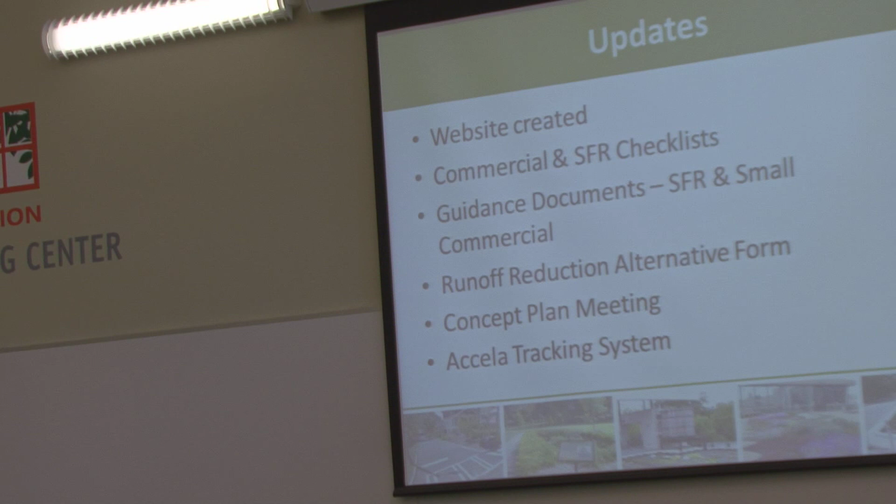Just real quick, I wanted to update everyone on some things that have taken place since we adopted our ordinance back in February. We've updated our website, thanks to Alan Harmon, the man behind the camera right over there. He did a great job putting all the reference materials and checklists related to our new ordinance on that website, which has been very beneficial and organized us a little bit. We've also updated our commercial and single family checklists to reflect the new ordinance changes.

We've developed some guidance documents. Some of y'all are aware of the single family residential guidance document we've put together; you can download a copy from our website. We're also working on a similar guidance document for small commercial redevelopment projects. We see a lot of mom and pop small developments in Atlanta in these urban corridors that don't have enough money to hire a full design team, so this is a way for us to help out with ideas like retrofitting a landscape island into a bioretention area or fitting a tree well in your parking lot. That should be out in the coming months.

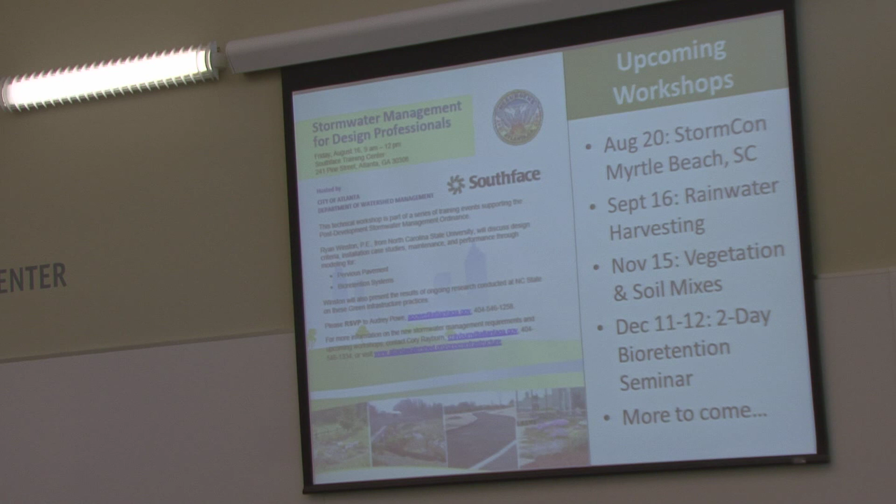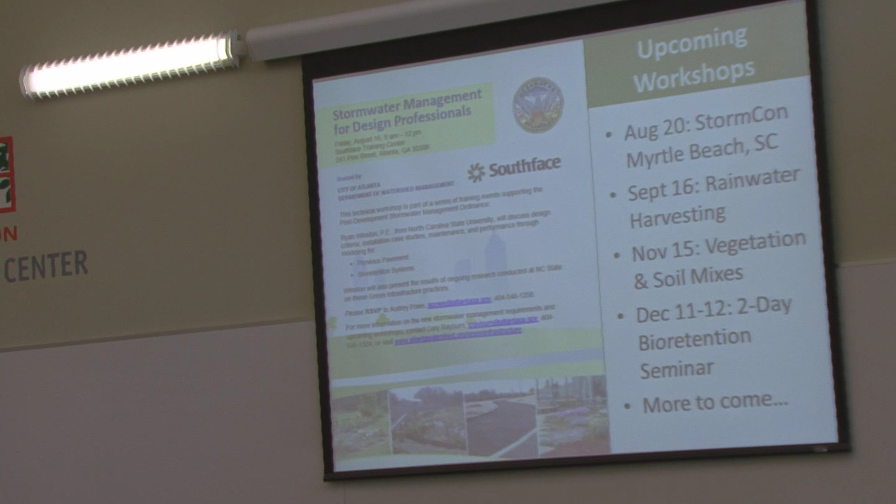This is the first of a series of workshops really focusing in on design for engineers and landscape architects. We want to get as technical as possible in these conversations, because these are new practices, primarily for the Southeast. A lot of these practices, as Ryan will touch on, have been around for many years, and there's been a lot of great research done. So we want to focus in on specific practices in the future.

Our upcoming workshops include: next week, Susan and I are presenting at StormCon up at Myrtle Beach, on the adoption of the ordinance, the processes, and a little technical background. In September, we're doing one on rainwater harvesting here in the Southface building - we've got some great speakers lined up. We'll hear case studies on the Georgia Tech project using rainwater for flushing toilets, and we'll also hear from the Hyatt at Buckhead, who've installed a rainwater harvesting system to handle their cooling towers.

In November, we're planning one on vegetation and soil mixes - we're still looking for some presenters for that. So if anybody has specialty in some of these areas, let us know, and we'd love to have you come present at one of these workshops. We haven't lined up the room yet for that one, so we'll talk to Joy about that possibly.

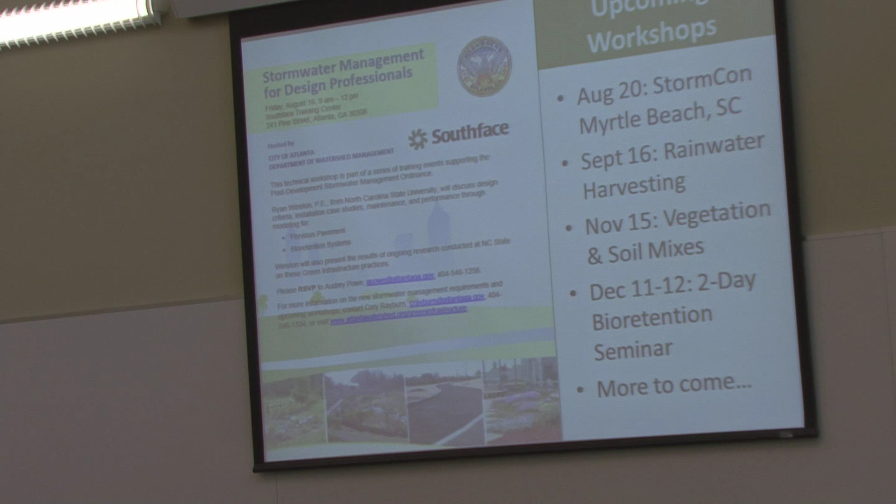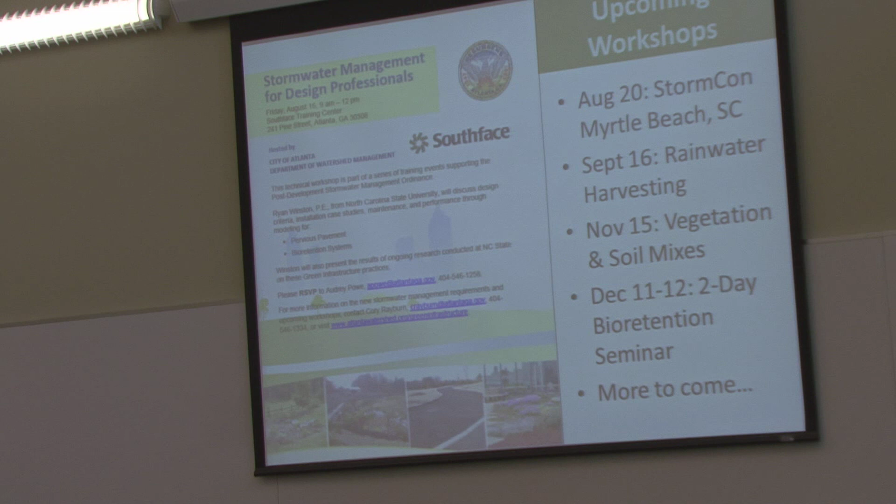Then in December, we're going to have folks from NC State and I believe a couple other specialists from around the country do a 2-day bioretention workshop, and that is going to be very in-depth. There is a fee associated with that one. If you need more information, you can go on our website - I don't think we've posted the flyer just yet, but we're working on that. The City of Atlanta is hosting that, and NC State folks are coming down to present.

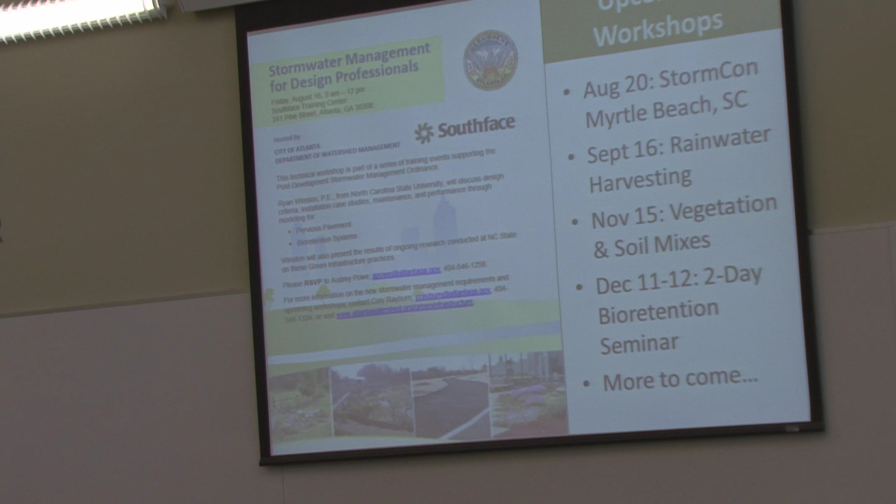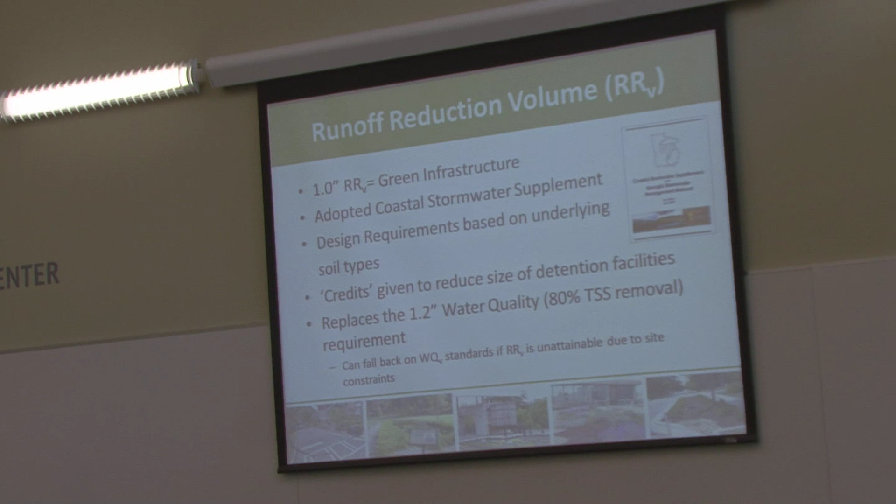So, just very briefly, I want to go ahead and hand it over to Ryan in a second, but I wanted to cover some of the information we're going to be discussing this morning as it pertains to Georgia and Atlanta in our new ordinance.

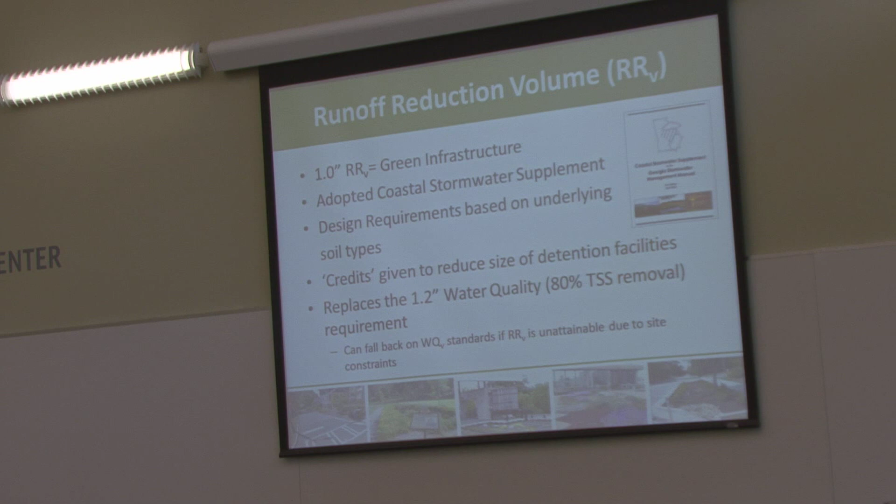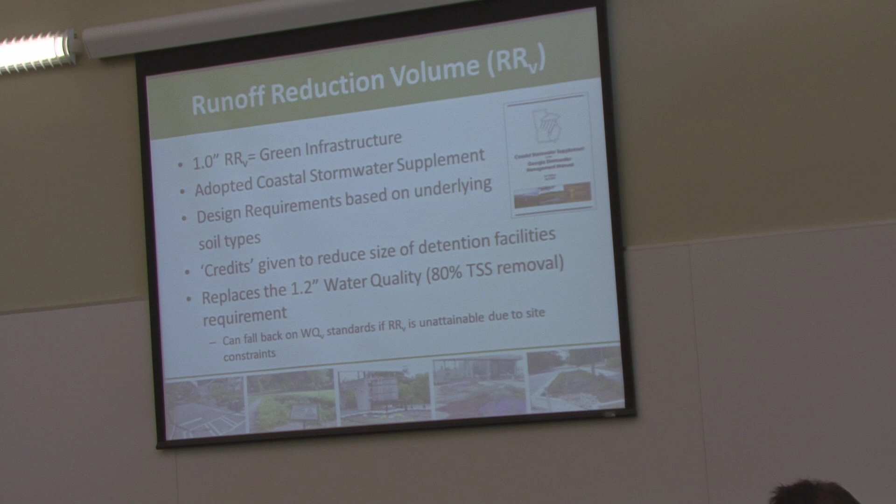We have adopted the runoff reduction volume found in the Coastal Stormwater Supplement, which is our technical design manual for now. We're working on possibly developing a Metro Atlanta design manual. We were just in a meeting a couple days ago with ARC, and they're finally starting to say they're going to update the Blue Book to include some of these practices. It's in the very early stages, but it is moving forward. We're making do with the guidance documents we have and the coastal supplement - those are our de facto design manuals for now, but that should be updated soon.

So the runoff reduction requirement is capturing that first 1 inch of rainfall that would drain off of impervious surfaces.

And keeping it on the job site, either infiltrating it, reusing it, or sending it into a landscape island where it can be sucked up by the plants. The design manual gives you credits for providing green infrastructure on your system, so you can reduce the size of your detention system. It also replaces the 1.2 inch water quality requirement.

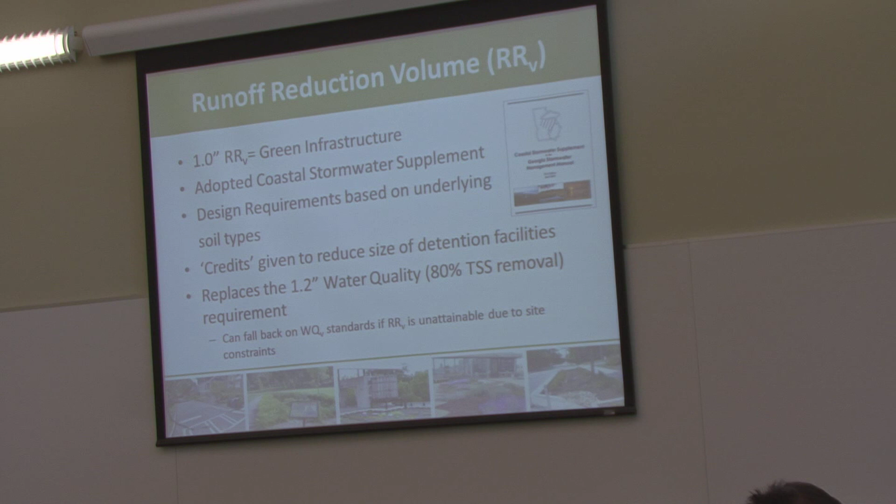If you have a site where, based on the underlying soils or other constraints, you just can't provide the entire 1 inch volume, and you provide written rationale as to why along with some data to back it up, then we'll let you fall back on the 1.2 inch water quality requirement.

Most of the projects that will meet these requirements are commercial redevelopment projects. In Atlanta, there's very little new development where you're clearing woods and putting up a new building—it's almost all redevelopment. For projects less than 500 square feet of new or replaced impervious surface, there's no stormwater management required.

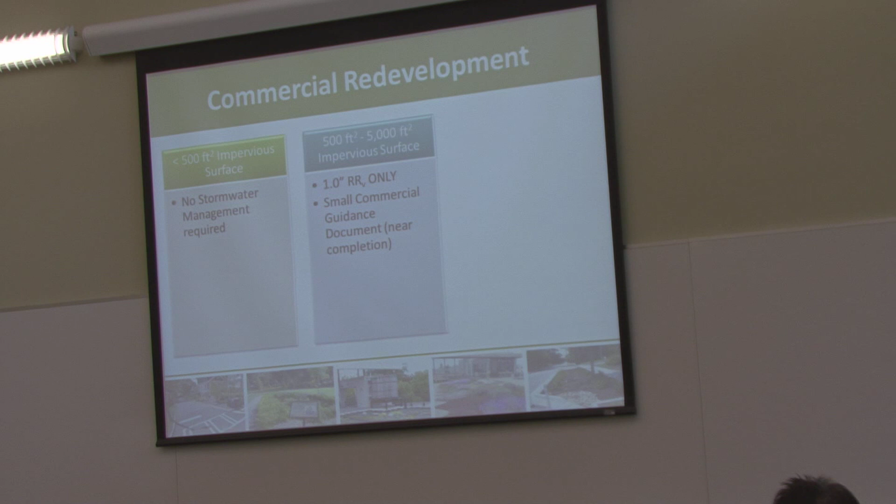Between 500 and 5,000 square feet, you only have to provide that 1 inch runoff reduction volume. Anything above 5,000 square feet requires a typical stormwater management plan with channel protection, rate reduction, and a hydrology study.

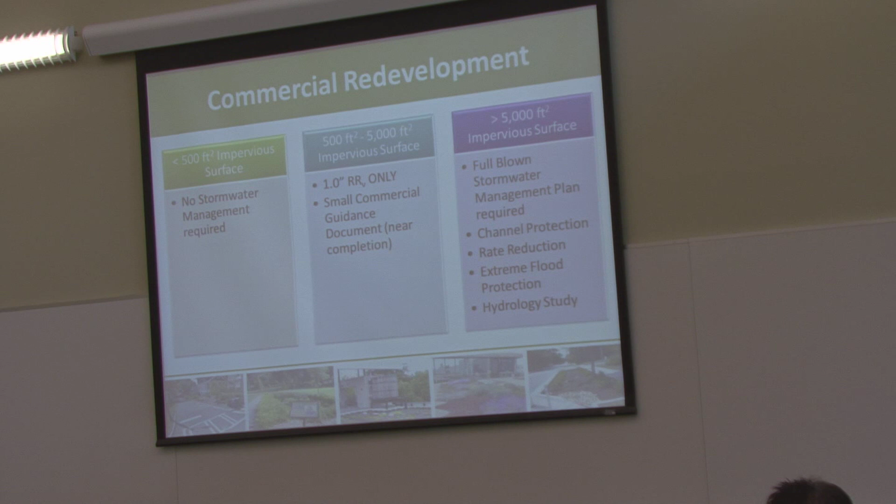Again, we have our guidance document for single-family development. Any new single-family home or large addition will need to provide that 1 inch volume requirement, and we have about six practices listed in this guidance document that have already been pre-approved to work on those single-family lots.

I hope this doesn't do this the whole time—it's kind of jumping around. I think the battery might be low.

We also have, in this book, tear-off detail sheets so you can just tear it off and staple it to your plans and have a good idea of what you'll have on that individual lot.

The concept plan meeting is for commercial projects only—for those categories over 500 square feet of new impervious surface. We want to sit down with you and go over the new ordinance, make sure engineers and developers are aware of the new requirements, and talk about opportunities to use some of these different practices in their site plan.

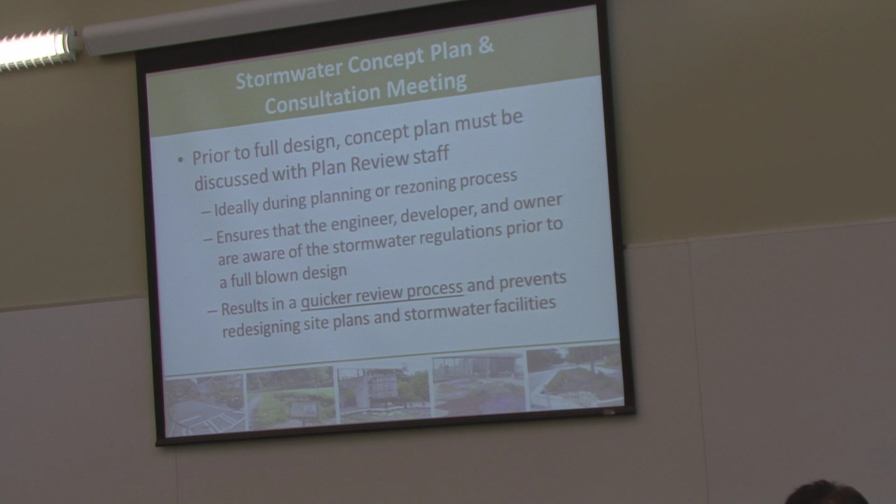So far this has worked really well. We've had over 100 meetings so far.

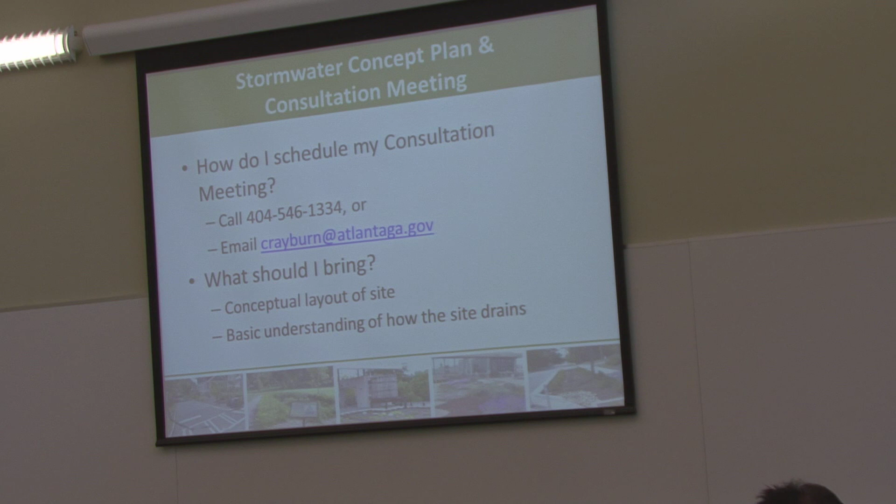Currently I've been doing these meetings just for consistency's sake, but in the future any of the site development reviewers will be able to hold one of these meetings. If you're downtown and want to just stop in, we should be able to take care of you.

Just a brief overview of what we're going to be talking about today with Ryan Winston. He's going to cover pervious pavement, which is basically an underlying drainage layer with an overlying permeable surface.

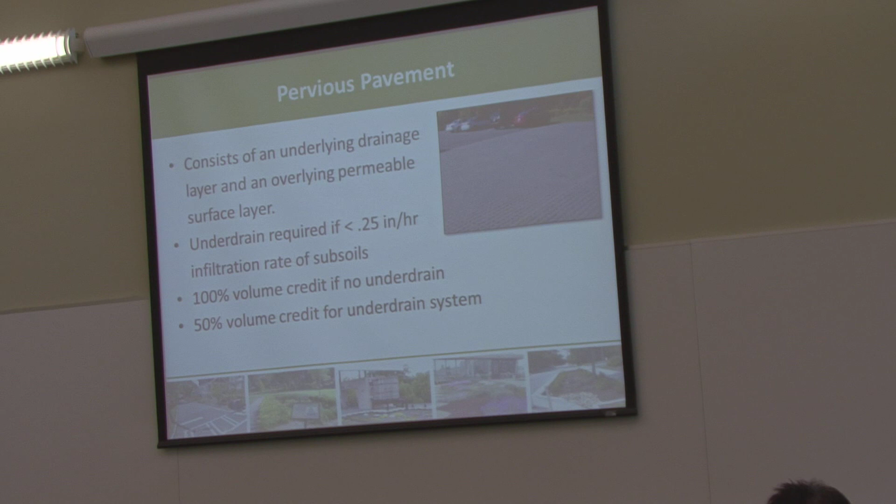Based on our design manual, if you have less than 0.25 inches per hour infiltration of the subsoils, then an underdrain is required. Essentially, if you have an underdrain system, you can only get 50% of the volume credit in the void space underneath that system. If you have better soils, you get 100% of that void space.

One of the new requirements for commercial development is providing infiltration testing up front during the design phase. We've seen some pretty decent infiltration rates—you'd be surprised, I think the majority of our results have been B soils. So there are B soils in Atlanta, you just might have to break through that top layer of compacted red clay to get there. We really do require those types of tests up front when you're putting those plans together.

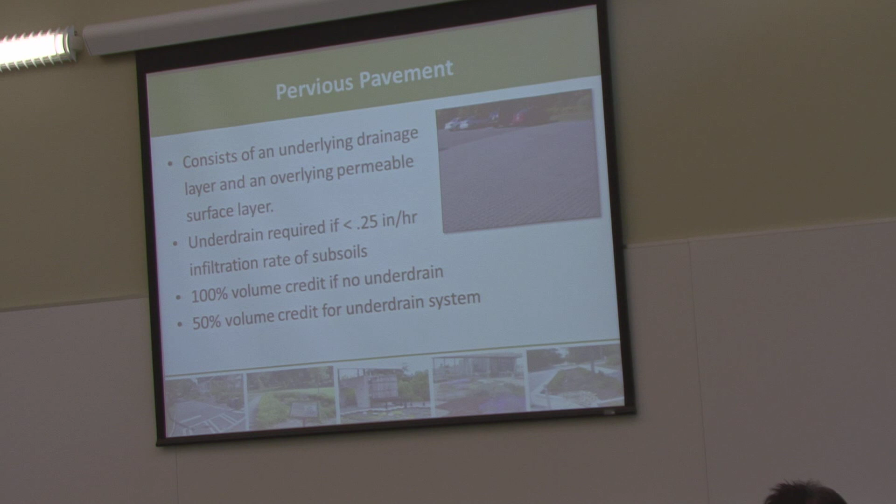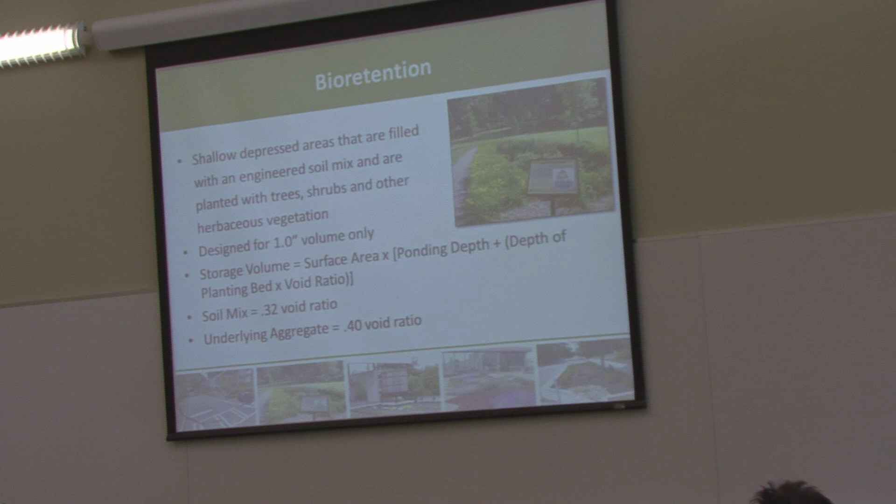Bioretention is another great practice that you can fit in with some of these tighter sites. Bioretention is just a shallow depressed area with engineered soil mix, then it's planted afterwards. If you need additional space, you can provide aggregate underneath that soil mix, and the ratios are listed below. The storage volume you get credit for is the surface area multiplied by the ponding depth.

The ponding depth is typically about 9 inches in the system, so you get full credit for that ponding depth, and then you get the depth of the planting bed multiplied by the void ratio. That'll give you a total volume for that practice.

Okay, and with that, hold on, let me grab something real quick. Going to introduce our speaker.

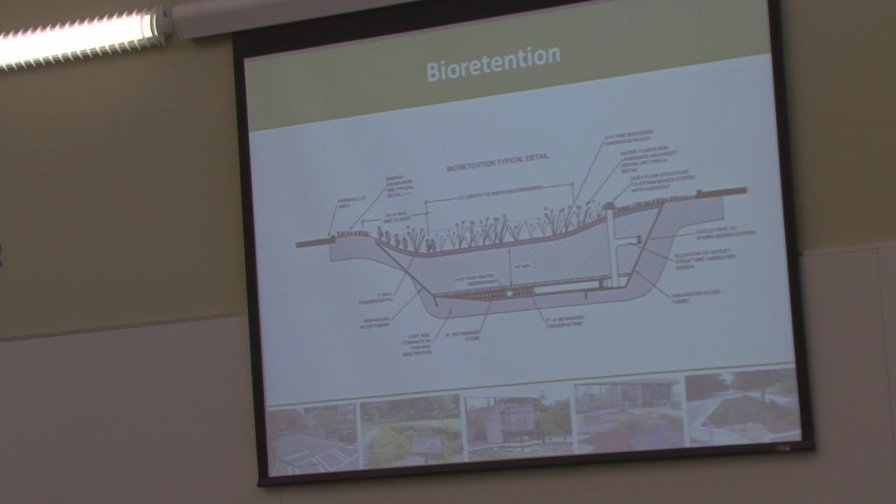We have a typical detail we're still working on for bioretention. This will be in our small commercial guidance document. You can see it has a raised underdrain on it, which is something that we like. If you do have poorer soils, this will develop an internal storage system. Ryan will go into that a little bit more. That's something that NC State has been doing a lot of research on, and it's something we're looking to adopt as well.

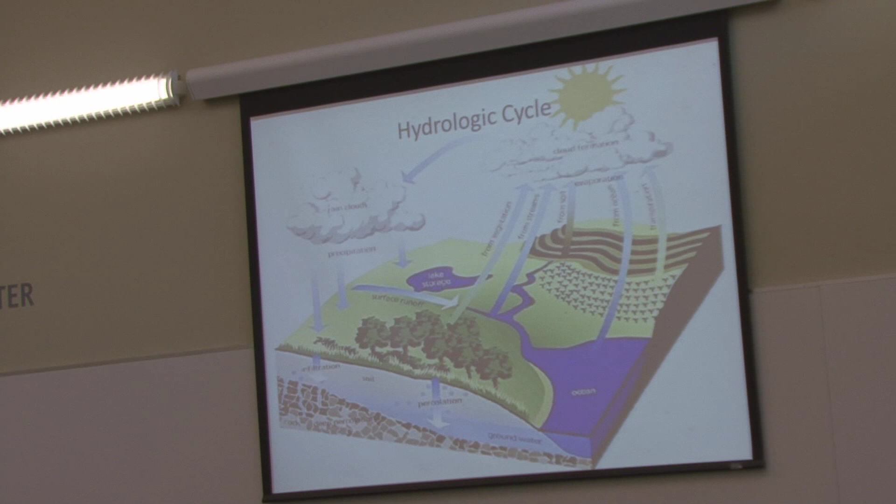As that hits the ground, we get surface runoff, and that's what we're really worried about with stormwater management. So when we pave, like we have the parking lot back over here, you drastically change that water cycle. You've got the vast majority of your water running off and down into your storm drain network. That's some of the things we're trying to change with our low-impact development practices.

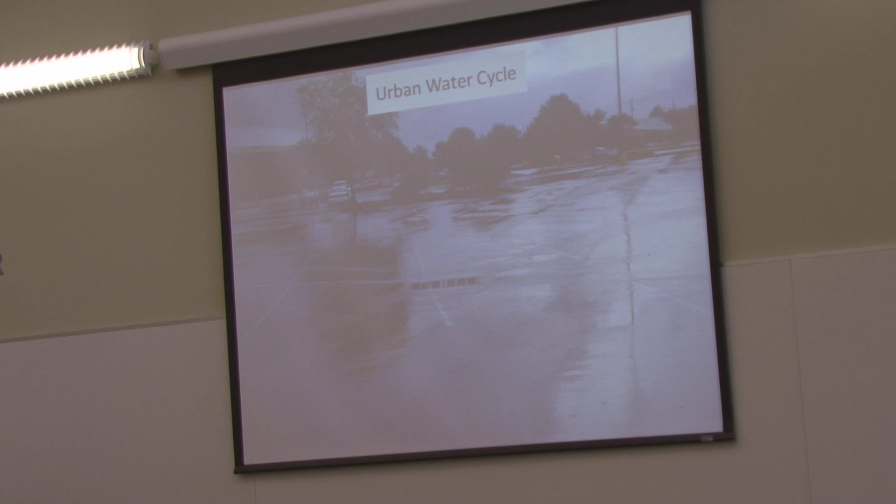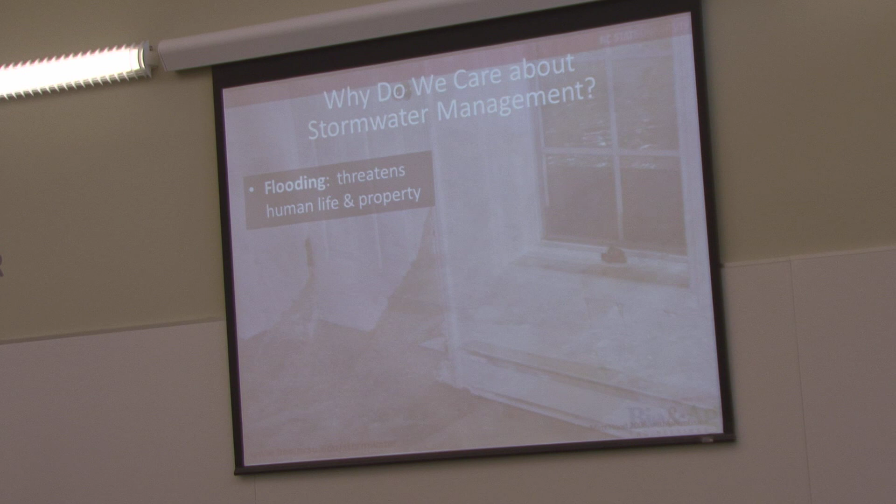So why do we care about stormwater management? The first one would be flooding. If that's your house, you're really in bad shape, so obviously it threatens life and property. Especially with a lot of the tropical events that we get that have first names here in Georgia and in North Carolina for that matter.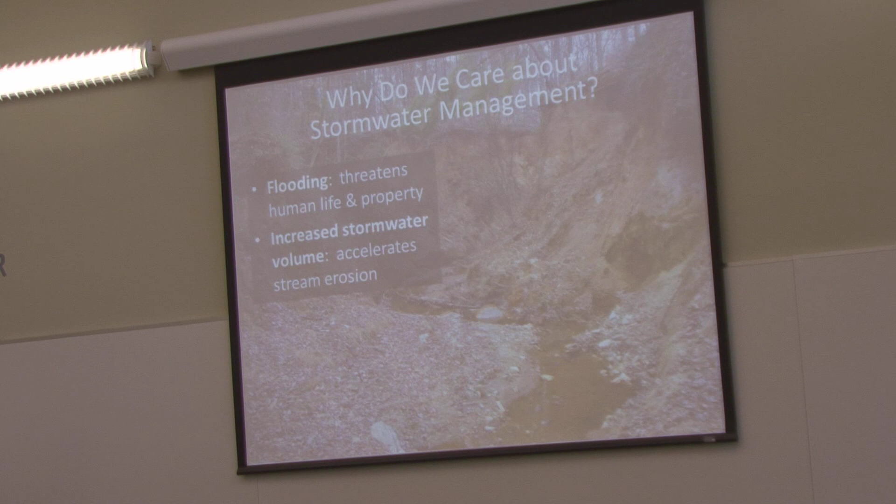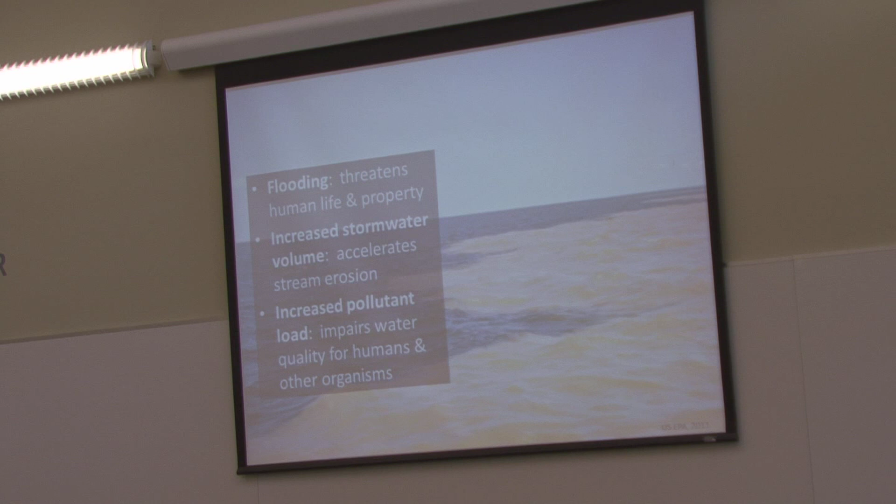Increased stormwater volume means we're getting more runoff going through our streams, and so you get stream bank erosion. This is actually on our vet school campus up at NC State - I hate to admit that, but it is. And then you get pollution: more pollutant load, more volume of runoff, and therefore more pollution coming off of your urban surfaces. That impairs our water quality, hurts our fishing and shellfishing waters, etc. So there's a lot of reasons why we care about stormwater management.

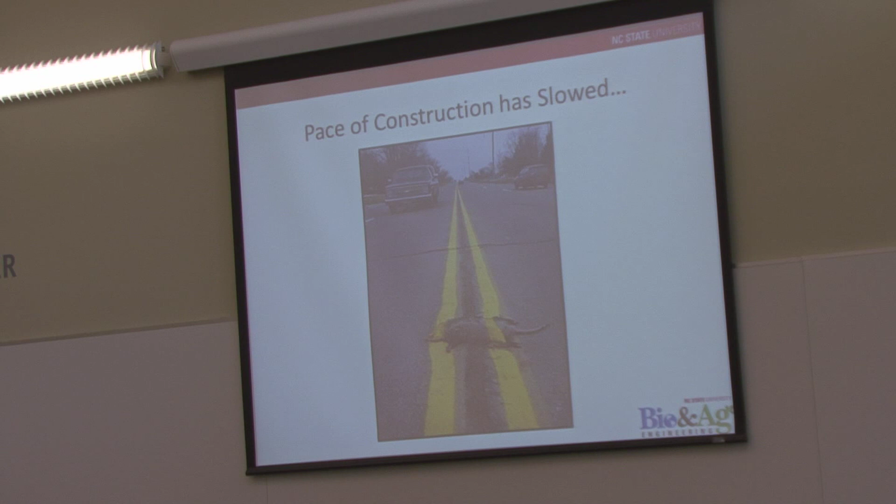Our pace of construction has slowed substantially in the past 5-6 years compared to 2006, 2007. So I think this is a really good time to go back and look at the way we develop. Obviously the City of Atlanta is doing that with the changes to their ordinances. We've got a chance here to really change our paradigm and what we do as far as development goes.

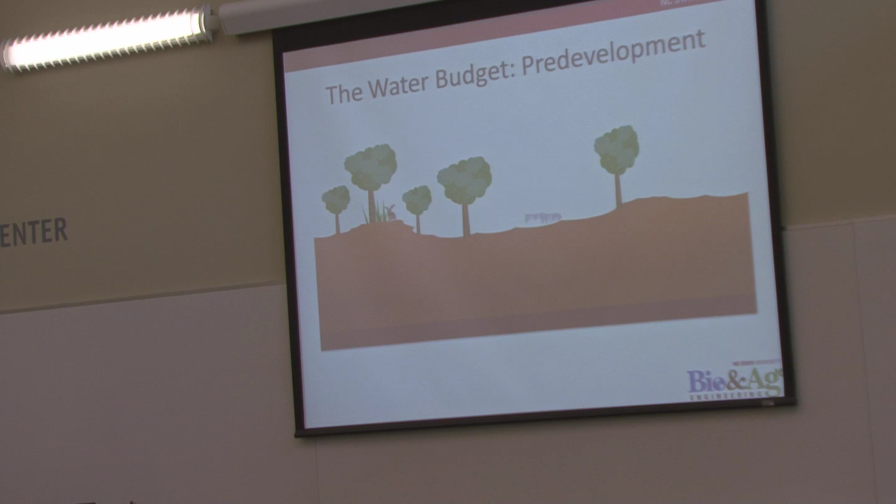So just a quick water budget for you. In pre-development conditions where you've got, let's say, a forest, which is typically what we'd have here in the southeast, you'd have a lot of canopy interception and just general depressional storage in your watershed.

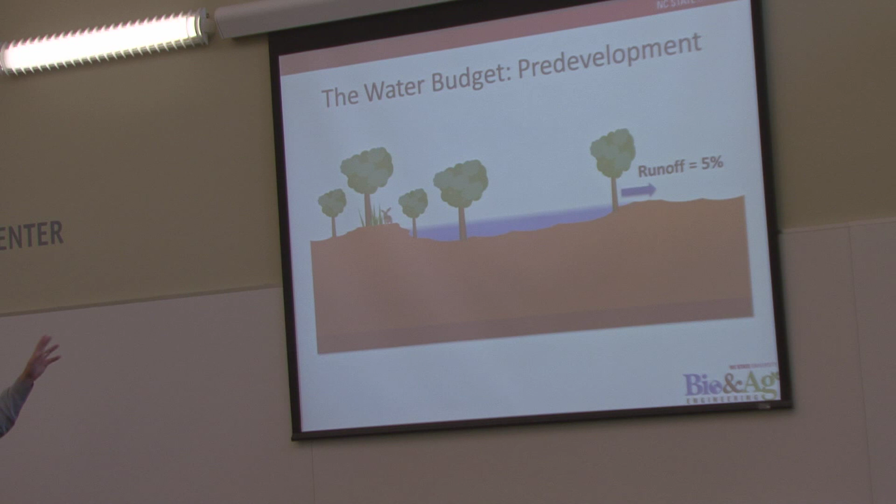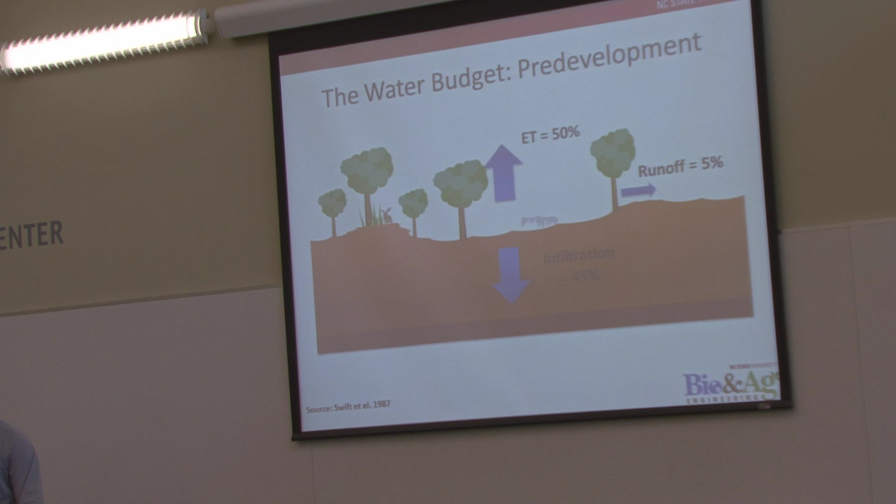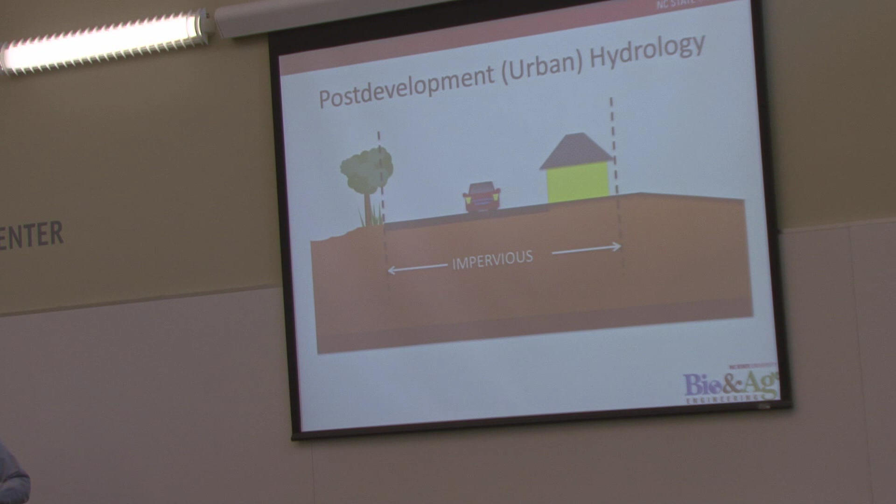So you have very, very little runoff. That 5% is very dependent on soil type, etc., but just bear with me, these are rough numbers. A majority of your water goes either back up into the air through evapotranspiration or back down into the ground through infiltration. Then you build your parking lot, your rooftop like we have here, and you change your hydrology substantially. You have a lot more impervious surfaces, and so what that leads to is greater generation of runoff. That 55% again is a very rough number, dependent on your density of development.

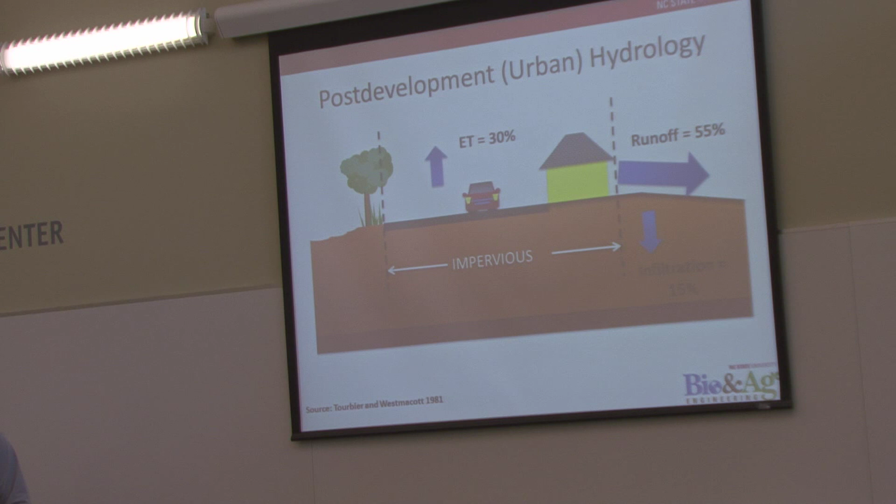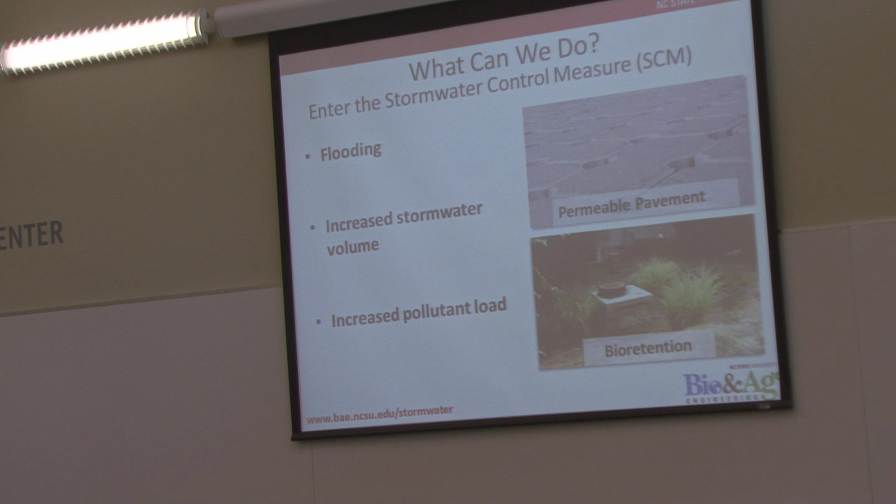So what can we do to mitigate these increases in impervious surfaces? We can implement stormwater control measures that we're going to talk about today. Bioretention and permeable pavement, I would say, are pretty much the standard bearers for low impact development, and the green roof, those are the three big ones.

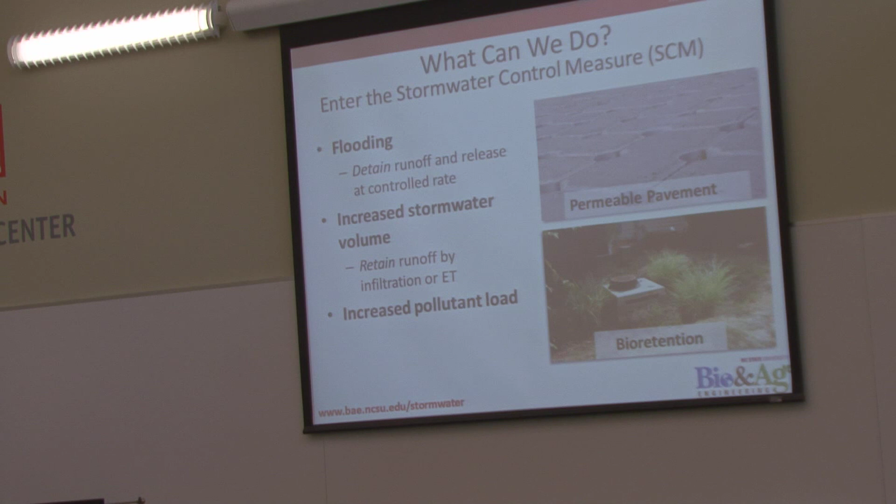In terms of flooding, we can detain the runoff and release it at a much slower rate, thereby reducing our stream bank erosion. We have increased volume coming off of our impervious surfaces, so we can retain some of that on site, and through filtering through media or uptake by plants, we can reduce the volume going to our storm drain network. We're also treating a lot of that increased pollutant load through filtration, sedimentation, and other processes occurring in our stormwater practices.

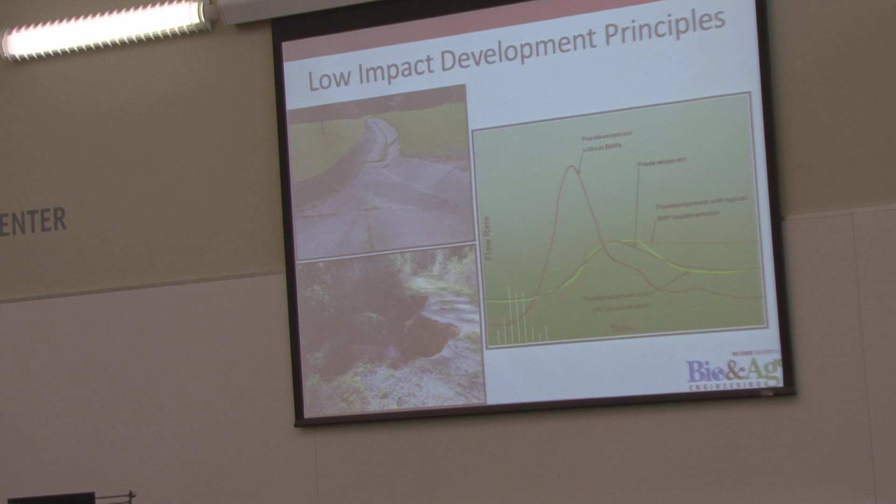Low impact development principles really are a big shift from our typical pipe and pond mentality. If you look at this graph, the red hydrograph, flow versus time, is our post-development, or post-development without any BMPs at all. Pre-development is here in green, so we've increased the amount of volume, or the area under the curve. We've increased the peak flow rate. There's more water essentially arriving faster.

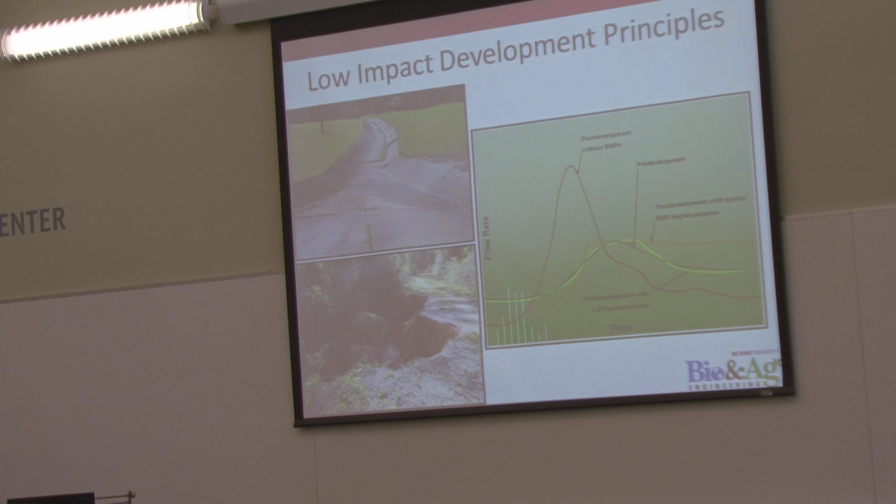If you implement a typical wet pond type situation, which is this burnt orange Texas color, University of Texas color, we match our peak flow rate, but that peak flow rate extends for a very long period of time, and you might have outflow from that pond for 2, 3, 4, even 5 days. What that does is you're impacting your stream banks substantially with those higher flow rates over a longer period of time. So with LID principles, what we're really trying to do is match the entire hydrograph, the peak flow rate, the amount of volume leaving our site post-development.

You can see here, the picture in the bottom left didn't show up very well. I won't name where this is, but this is in a 2-hour radius from Atlanta. You can see some of the old development styles we had, where we had these concrete trapezoidal channels, and a roadway here that's given way, and this is kind of hard to see, but that's an 8-foot diameter culvert that has been lost due to the amount of flow going through that system. So this is really what we're trying to avoid.

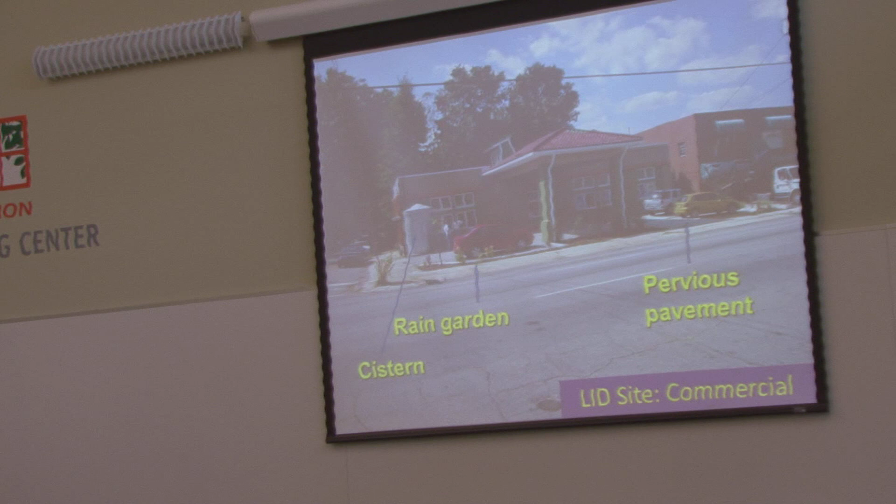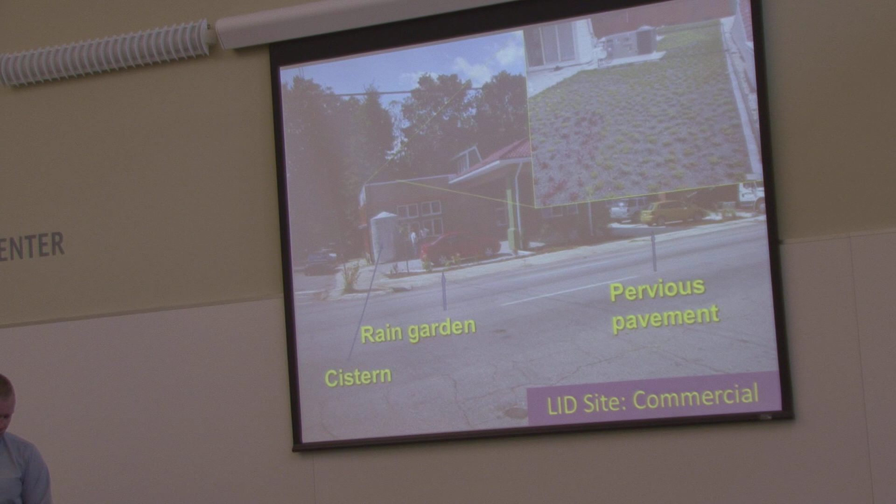So a quick example of an LID site. This is a commercial site in downtown Raleigh, an old gas station, and they've redone it with pervious pavement, a rain garden out front, a cistern for water reuse, and a green roof on top. Very similar to what we've got here at this building - a very integrated use of BMPs on the site.

So let's jump in and talk about bioretention now. Bioretention really is one of the best practices you can use as far as both water quality and water quantity control as far as a green infrastructure practice goes. The reason for that is there's so many mechanisms for pollutant removal as well as infiltration into the underlying soil.

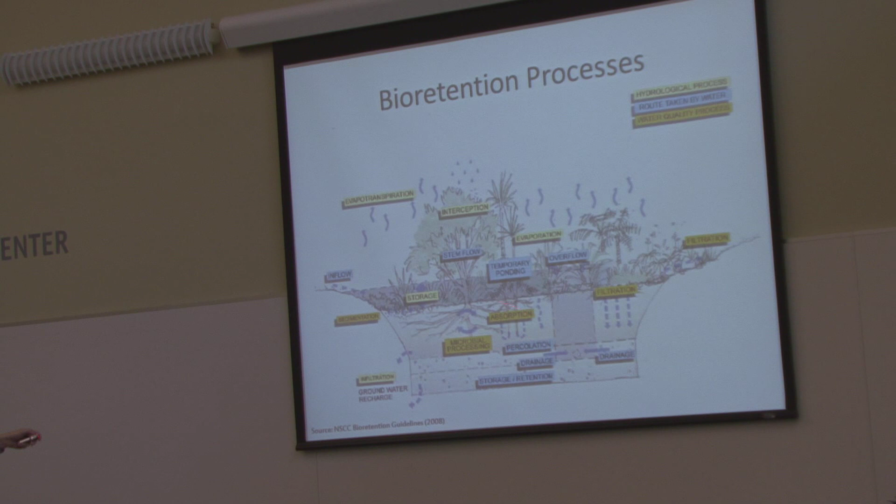So what we essentially have is surface ponding in what we term the bowl. We have an overflow structure typically, and then a specially designed media. We'll talk a lot about the media. And then we have a drainage layer that's typically rock or aggregate, forming an envelope around an underdrain, typically a perforated underdrain. So where can you find these systems?

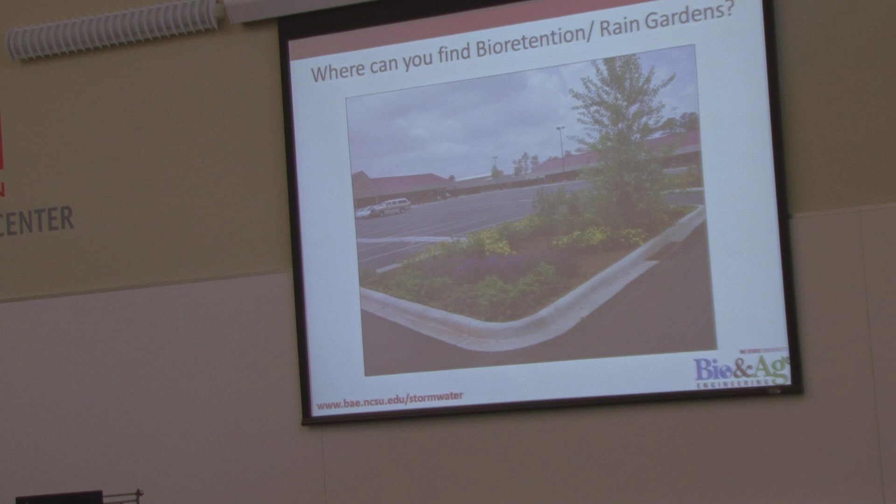There's a number of places you can find them. This is an ultra-urban application at a mall in Charlotte, where I had my computer stolen, unfortunately. That's another story for another day.

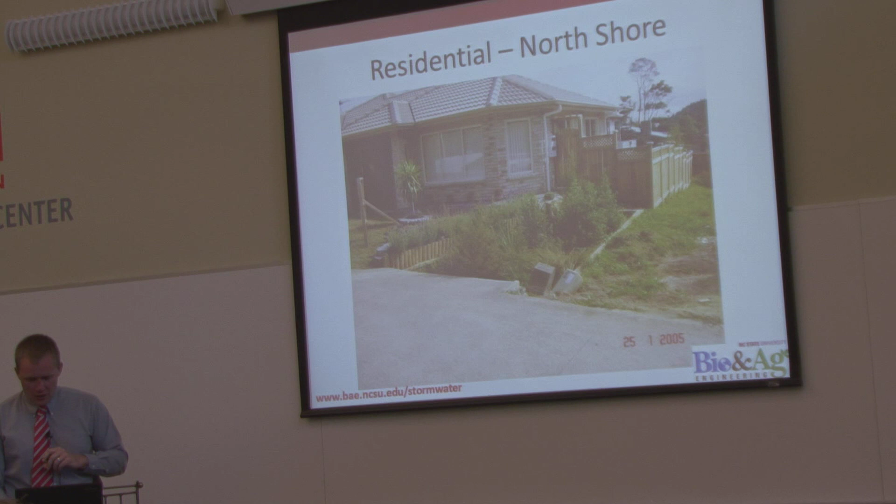This is an application in New Zealand. This is my mother's home country.